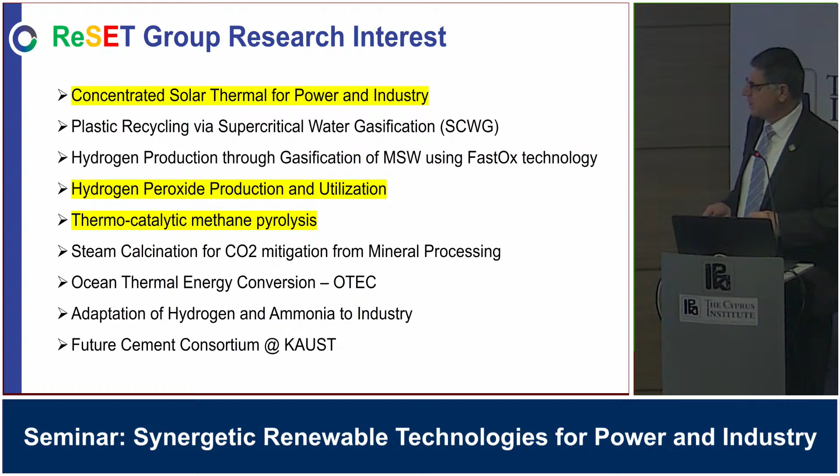So this is in general what I do. There's a lot of smaller projects that I won't mention here.

Okay, so let's look at CST, and I'm sure a lot of people have interest in here. Apologies that I kept it simplistic, and some of it is straightforward, but I didn't know how broad the audience knowledge is here or online, so I don't have to dwell on this. How do you concentrate solar energy?

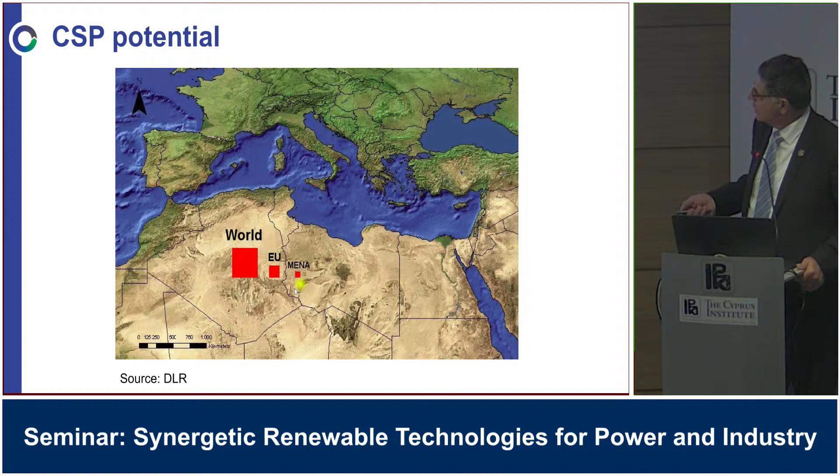I'm sure all of you have seen this before. The size of the solar resource here, of course, could power the rest of the world. But as most of you would have seen, you could see here how the cost of CSP has been dropping much faster than PV ever did. Although I only have data at 21, I think the trend is continuing, especially as China is coming online now with massive automation of production, where their pilot plant is 110 megawatts.

So the same thing happened. There's an interesting video online, I encourage you to watch it, by Martin Green from University of New South Wales, where he talks about how PV reached where it is. He says how his Chinese PhD student, who had a patent and a new invention, went to China, raised some funds from the government, and started manufacturing PV cells, how he listed on a stock exchange in New York, how within a week he raised $100 million. He goes through how PV costs have been reducing over time, and how they reach some plateaus at certain stages. He says, okay, now scaling is not enough, we need innovation. So when innovation comes, the efficiency increases and so on. But you could see somehow we are reaching some limit in terms of how much additional.

Of course, the more penetration there is, there's a problem with storage. Batteries - I'm sure you've seen the critical minerals report, how lithium demand by 2035 is going to be twice the ever possible supply, and in 2022 alone the price of lithium went up twice.

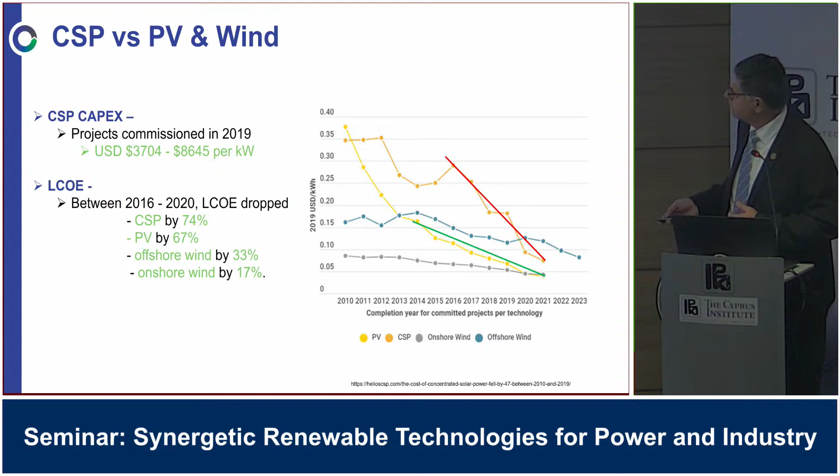So there is a problem in terms of storage, and that's where CSP offers a lot of advantage. You could see here the LCOE has been dropping - it's all captured in here. The other two are wind, as you can see there. And this is what's relevant to us here.

This is Saudi Arabia, and this is the solar resource in Saudi Arabia. I'm sure you've heard about NEOM, the new city being built there - NEOM is going to be in this area. You could see here you have the best results. In fact, a combination of solar and wind could give you roughly 19 hours. That's really a lot of energy you could utilize.

So this shows the relative amount of energy available compared to Spain, where Spain was one of the pioneering countries to install renewables. And I'll put in Dubai here, because as you know, Dubai has just

commissioned 250 megawatts of tower plus troughs as part of their energy mix. Interesting - I was talking to Acwa Power, who did the project, and they said their initial contract required energy to kick in at 4 p.m. until the morning, which is all about storage, since they have something like 18 hours of storage or thereabout. But then they changed the contract to supply energy across the day as well.

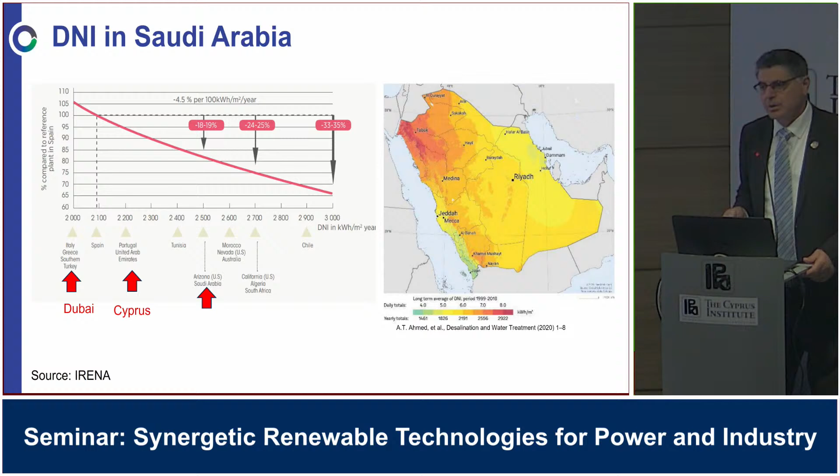Storage, at the end of the day, is where CSP thermal storage is an advantage - it can be utilized and reduces the cost if you combine them together. This is an important statement: there is more CSP thermal storage connected to the grid than battery storage.

I think only three plus years ago there was the biggest Tesla battery in South Australia, where I was, at the University of Adelaide - 100 megawatts, but that would run the state for only 1 hour. They installed it for different reasons: to stabilize the network, and to break the monopoly of two companies there who were holding supply to get the prices up. They recovered the cost within 2.5 years, which is substantial.

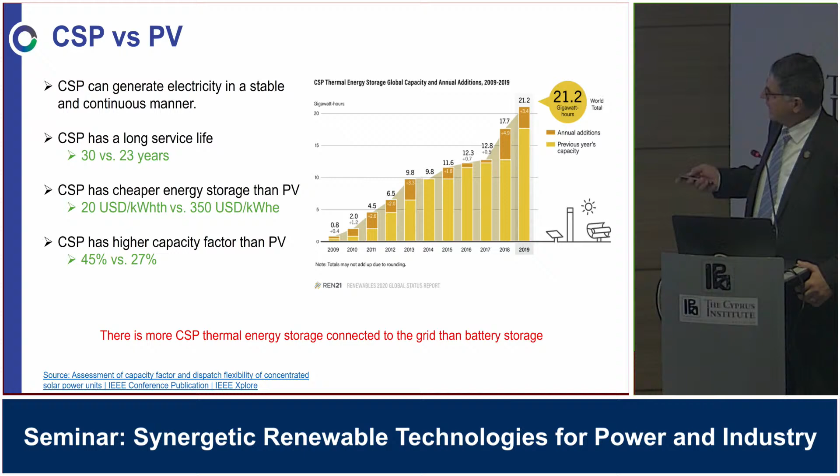So again, this audience would know all about capacity factors. This is another plot showing the thermal storage compared to all scenarios associated with batteries.

Now, of course, some of you will jump at me saying battery technology is developing, and every second day there's a big announcement. One thing is to have something really efficient, another is to have it cost effective, as well as a supply chain. These days people talk about TRL 11, not just 9. TRL 9 means it's commercially available, you buy it off the shelf. TRL 11 asks: can you buy it, is there enough of this material, can we produce it on time, can you install it? Taking it to the real world is different from saying I could buy it today - sure, demonstrations are all over the place. So the problem is, can we actually make it happen, and would it make any impact or difference?

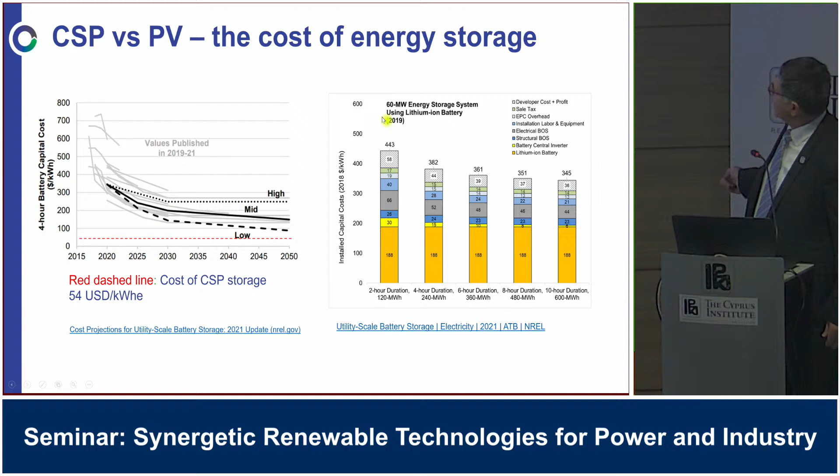Again, here are comparisons between costs of storage of different types and how the distribution is in terms of the capex.

I started by talking about synergies. The levelized cost of electricity when you combine CST and PV is much better than what you get with PV and batteries. This is where I think the niche markets for CSP need to be.

In addition, in my opinion, there are applications to the process industry. There, our efficiency is almost 80%. Whatever losses you have in the system, you're collecting all this thermal energy that you could utilize directly rather than converting it through cycles and so on.

Here are the different molten salts and so on that you could utilize. The cost, of course, going into high temperature will give you higher efficiency.

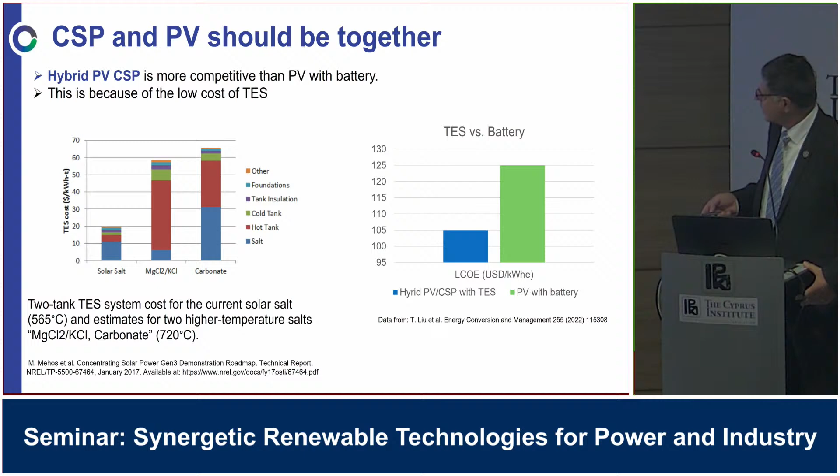In these small projects we did, a master student was visiting me. I'm not sure if you heard about concentrated PV and thermal, CPVT. So what you do is use a Fresnel system. You put a channel that has some sort of liquid in it, and this liquid has nanoparticles that can absorb at a particular wavelength. One of the problems with PV is that you only utilize the visible and the UV, and all the infrared is actually where the heat is.

That infrared is basically heating up the cells and making them less effective. In Saudi Arabia it gets up to 50 degrees, so the temperature heats up, and you can't cool it down, and then the efficiencies start dropping after a particular temperature.

So the idea here is that the energy you collect, mostly in the long wavelength, you store, and we kept it atmospheric at 95 degrees. You could utilize it, of course, at low efficiency, but you have some sort of storage, and the rest of it will go into the PV.

So we did an exercise of looking at what the techno-economics would look like, monofacial, bifacial, at different places in Saudi Arabia and so on. It's expensive, yeah, but nonetheless we need to keep thinking outside the box and figure out how we can solve this problem.

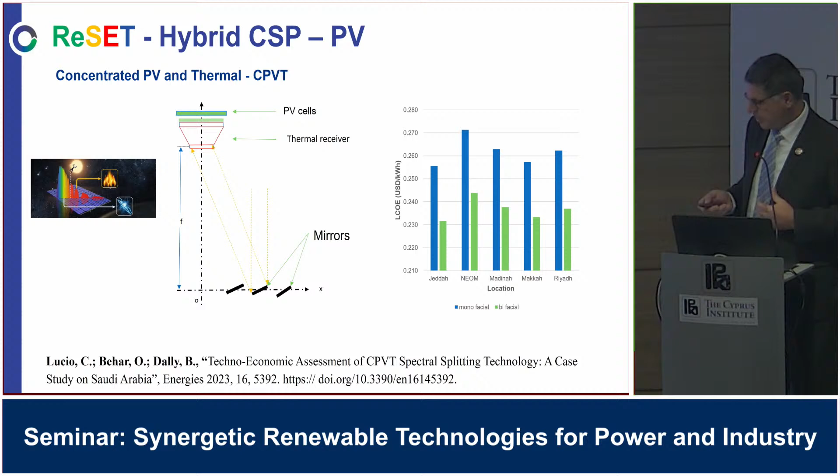Now, looking at the next generation in a way, one thing I got interested in is supercritical CO2 cycles. If I could get to 700 degrees, the good thing about supercritical CO2 cycles is that you could operate at a higher efficiency at low capacity.

That means a 1 megawatt turbine, which usually you could fit on a table, has really good efficiency. With these concentrated solar systems, you're not going to go to 100 megawatts if you have a cavity and high temperature. You're going to be restricted to maybe 10, 5, 15, 30 megawatts. So then you need an energy conversion cycle that is high efficiency at low capacity.

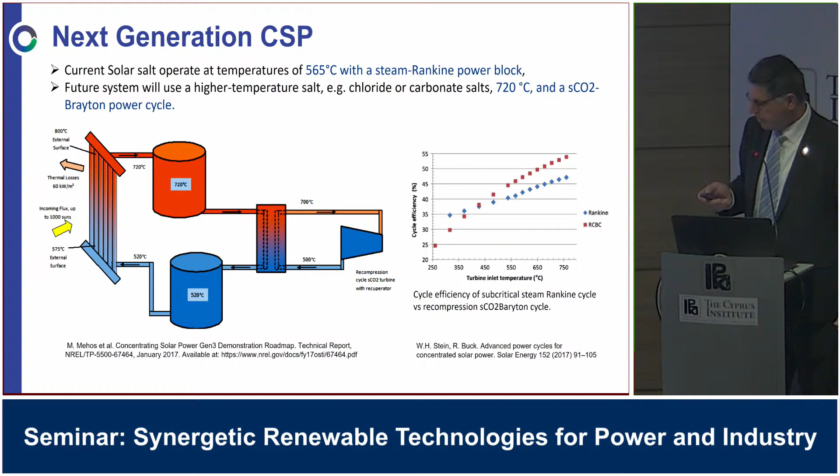So we started looking at this. We're not the only ones, of course. There's a whole European project looking at supercritical CO2. Can we do a supercritical CO2 cycle using solar thermal, and what we could do about it. In particular, we focused on the receiver.

So this thing was designed and is being built. The idea here is that, first, this heat exchanger can handle 100 bar. It's 3D printed and has special channels inside as well. The volume is full of molten metal. Currently we're using gallium, and you have a normal cavity in here.

The idea is I could run it to 100 bars, 700 degrees, which will be highly suitable for supercritical CO2 applications. For CO2, you need about 73.8 bar to get it to supercritical conditions, and 700 degrees, of course, is good.

So what we're hoping for, and why we're filling it up with molten metal, is to enhance the heat transfer and to allow this heat exchanger to expand in whichever way it wants without being restricted, other than on the top, where there's another inlet as well. And then have basically some thermal mass, so that if I have a cloud or something like that, I don't end up with a total reduction in a very short period.

This work started with University of Adelaide. Mehdi Jafarian, who's now moved on to somewhere else, is supporting us.

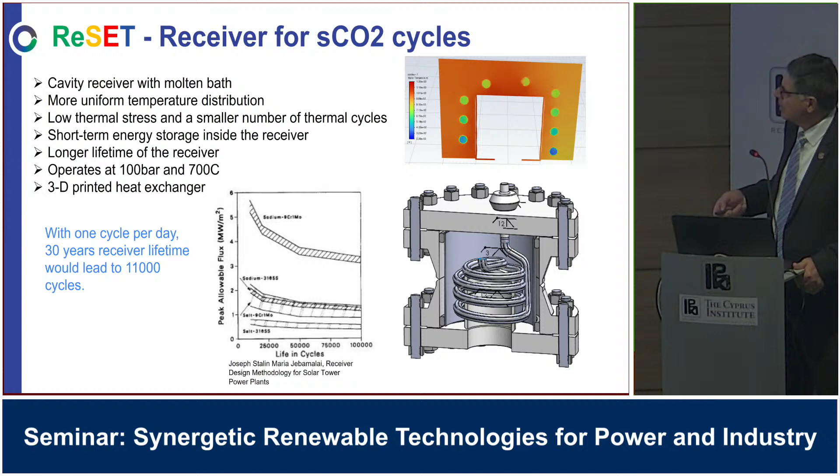So for that, I built a solar simulator. It's 42 kilowatt electric, giving me around 12 kilowatt thermal. Bought it from China, gives me a 60 to 80 millimeter diameter, and it can be modulated from 2 all the way to 42, with 7 xenon arc lamps, each 6 kilowatt.

It's now fully operational. It took us a long time. It's a small room, you need to get all this in it. The rest of the 30 kilowatt you need to get out somehow, which we managed to do, and now it's fully operational.

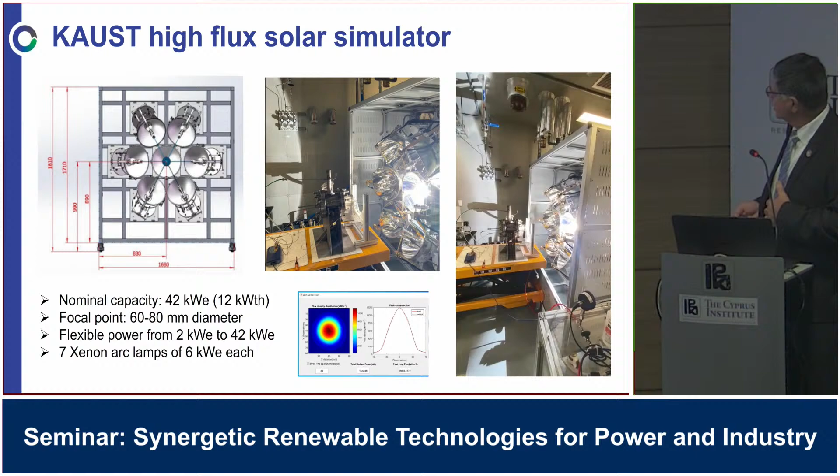Here's another design which is again utilizing 3D printing. Here I want to do industrial gases - I want to heat up air to high temperature at pressure and see if I could crack the efficiency part to try and make it economical.

So what you're looking at here is a 3D printed porous material made out of Inconel in this case. Within it is a double helical integrated heat exchanger that will give me up to 10 bar for now. We set 10 bar to allow it to go, but I think we're going to do hydrostatic testing to see if we could go to much higher pressures.

The idea here, we modeled the whole system. We do have a concentrator in there, and then we looked at the flux at different directions, and then we changed the porosity to trap the energy as it goes through.

We've done some modeling and we think it's going to work well. It has been printed, it has been heat treated, and we should get it next week.

We want to try and start with air and see how we go from there in terms of other gases that we're going to try and basically pressurize and heat up. Mostly we're interested in the energy density evaluation - can I get to the energy density required to make it viable, basically?

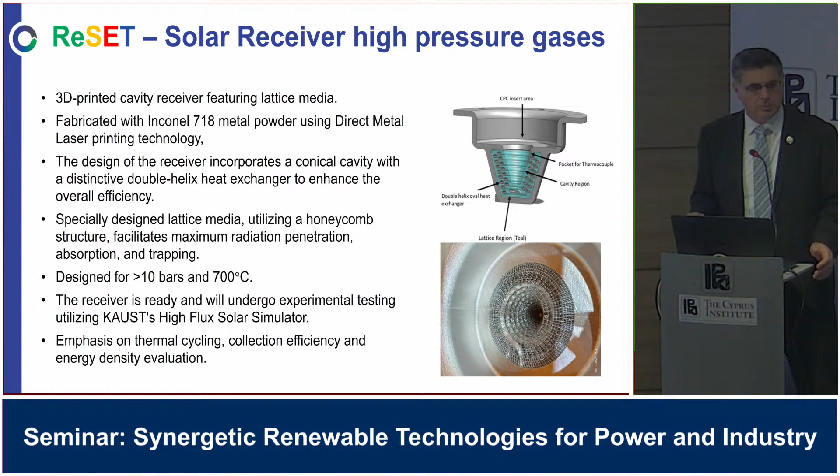That's another project looking at - I mean, this is a simplistic view - can I use concentrated solar for ammonia cracking? Of course, 28% of the energy of ammonia goes to power the cracking back into hydrogen and nitrogen.

The idea is that Saudi Arabia wants to export blue ammonia to the world, and then from there they're going to crack it. They developed a very efficient catalyst, but they need to run it at 450 degrees. So the idea is, can I do this here? Can I heat it up to 450 degrees and so on, and what sort of conversion efficiency am I likely to expect?

The catalyst is supposed to operate at more than 80% at these conditions. Of course, you need the membrane, you have to separate it and so on.

But the real big project is looking at hydrogen sulfide. Most natural gas in Saudi Arabia has H2S in it, and there's a lot of restrictions. Once it burns, of course, it creates lots of nasty things that you don't want in the atmosphere.

Then they're looking at what's called a photocatalytic way to remove H2S. Currently they're saying just destroy it - in other words, there's a catalyst that could operate up to 800 degrees, by which H2S is basically separated. The sulfur supposedly ends up in its solid form that we'll be able to remove, and then you have hydrogen that goes with the natural gas we want to capture, basically.

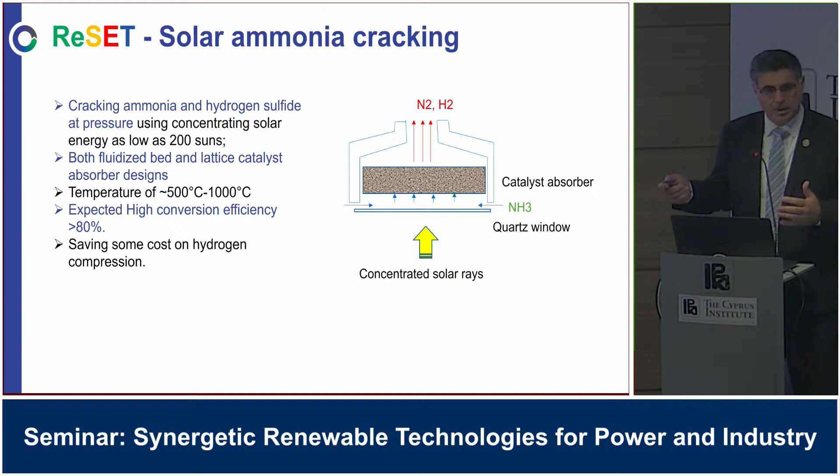That's another thing that I learned in the past, and also with the synergy, is hybridization. So when we looked at how do you introduce renewables to industry, first thing industry wants is firm supply. They want it all the time. They want fixed temperature, and they want certainty. They're risk averse, they won't allow you to say, oops, today the sun is not up.

So what we came up with is what we call a hybrid solar receiver combustor, basically combining both expertise. This is just a normal cavity, and here we have additional burners that during the night we're able to close this window and operate the burners, keeping the whole system hot, and then during the day open it up and continue operating.

But what we managed to do is also a 3-mode system: solar only, combustion only, and combined solar and combustion. We built the system at 20 kilowatts, could go up to 40. Then we looked at the efficiency of the collection, the maximum temperature we're able to achieve, and we had students doing techno-economics as well.

So there's advantages, of course. You could start operating anytime, once the sun is up, so you don't need a threshold for things to start. You could continue operating, so your molten salt remains at the required temperature all the time. It's one system rather than two or three, so you have one energy source if you want. We compare this to a standalone boiler that needs to run idle all the time, so this is continuously operating.

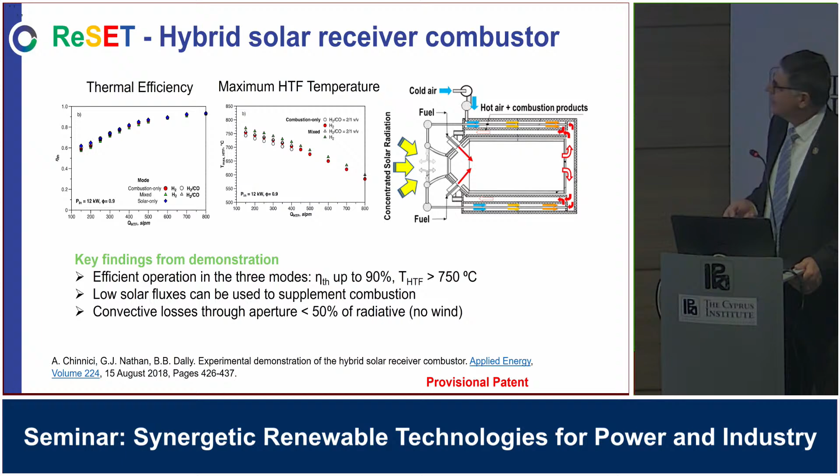So I'm looking to scale this up. It's not on the top of my priority. We do have a provisional patent on it, but that's something in the background now.

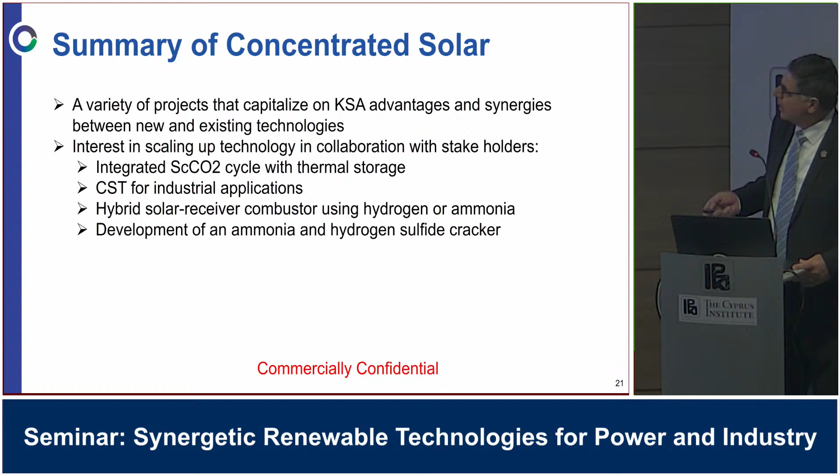So let me summarize the concentrated solar work: a variety of projects that capitalize on the Kingdom of Saudi Arabia's advantages and synergies between new and existing technologies, with interest in scaling up technologies for the supercritical applications, for industrial applications, for the hybrid system, and also for the ammonia and sulfide crackers. I could stop here, or we'll have questions at the end.

So the motivation is finding a cost-effective solution to store, transport, and utilize oxygen, which will help reduce the cost of green hydrogen. If I can valorize oxygen, then the price of hydrogen is supposed to drop. So the concept is to convert or store O2 in H2O2, ending up with 40+% by mass of H2O2 being oxygen, using electrolysis or plasma, and then transported with water.

Now, H2O2 in its pure form is highly explosive. It has been used in the past as a rocket fuel. But if you blend it up to 40% H2O2 in water, it's safe—you could go to the shop and buy a gallon and bring it home. And we need to find utilization routes. Producing it is one thing; what do you do with it is another. One question people ask is, okay, we have oxygen, but all the oxygen we need we could get from an air separation unit and generate it on the spot—you don't need any of this. Of course, there's a cost of transport, a cost of pressurizing, and risk as well.

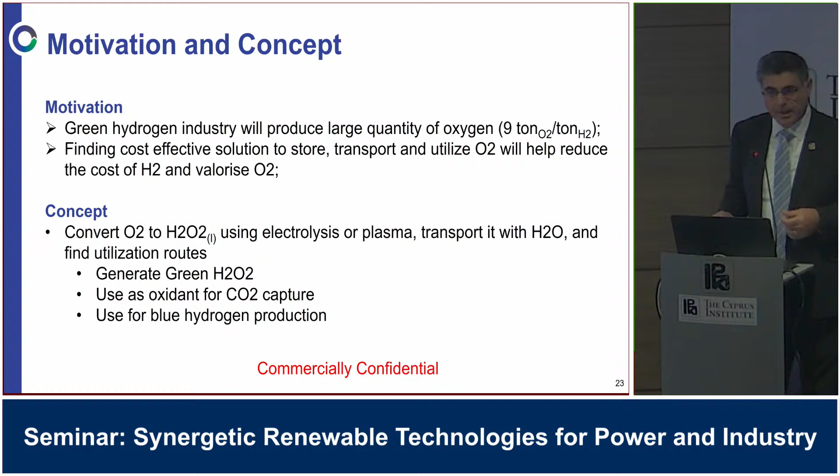That reduces the capture cost. And maybe also use it for blue hydrogen. What do I need to produce hydrogen from fossil fuels? I need steam and I need oxygen. Now, this has steam and oxygen and renewable energy in it as well. So this is the concept, yeah?

This is a little bit more information about H2O2. I won't bore you with a lot of the details. It's an interesting molecule that can easily lose its oxygen if it gets in contact with some metals. So maintaining it in its original form is a challenge. But if you put it in water, you should be safe.

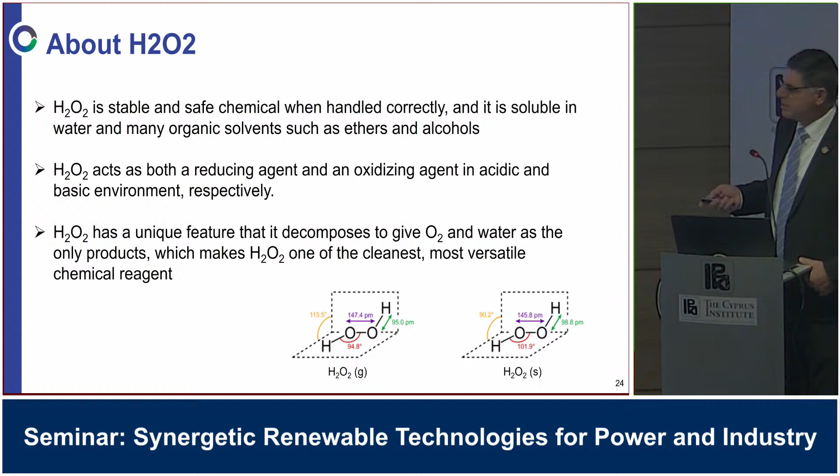So usage and price: currently there's 4.5 million tons per annum as of 2020. Paper industry and chemical synthesis is where it's used. Market price is between 500 and 1,200. Remember these numbers, because I'm going to show you new numbers in a minute using the other routes.

So this is how it's being used: as a disinfectant, by the way, you could buy it in pharmacies, or people use it to clean things, but those are at a concentration of 1 or 2%. So the grades: 90 to 95% is pure fuel used in rocket propellants, 35% is for other things, and less than that for domestic use.

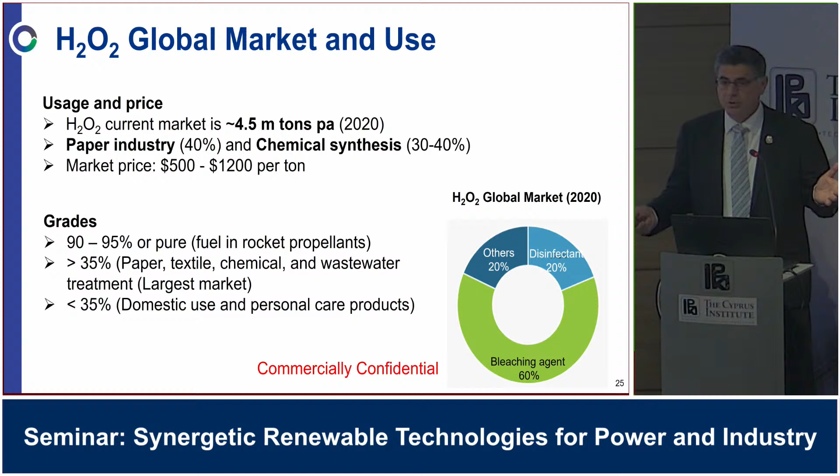Okay, so there's a market. We know how to deal with it. We've been producing it for a while. This is where it's being produced. Again, I won't bore you with the details, but this is where most of the production is.

And then the large scale process is using an agent called anthraquinone, which accounts for about 95% of global H2O2 being produced today. The most important part is that through doing this, you have to start with hydrogen and oxygen, and then combine them using a third agent, and it's a lengthy process. It's actually energy intensive, and each ton produces roughly 600 kilograms of CO2. So yes, I want to valorize oxygen, but if I'm able to find a route to produce green H2O2, then I actually also save on CO2, and I'll have a new market for it, although the quantities are not huge.

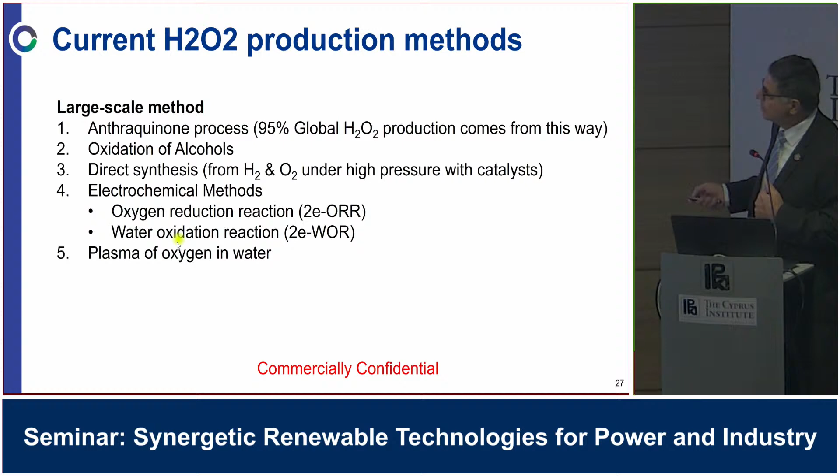The other processes are oxidation of alcohols, direct synthesis electrochemically, and plasma in water. So I'll show you some of these techniques and what's wrong and what's good about each.

So here's the three: there's hydrogenation, then oxidation, and then extraction. And this is the magical number: 600 kilograms of CO2 per ton of H2O2 today. And it's energy intensive as well.

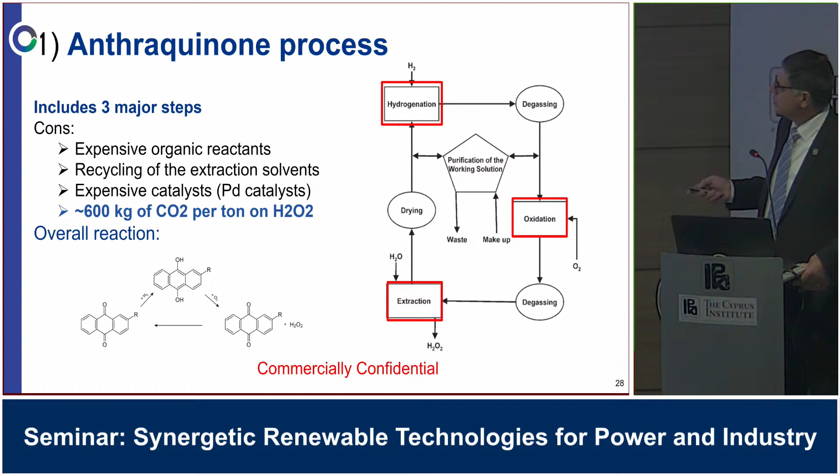Two-propanol oxidation or other oxidations of alcohol is also known, but you have to start with something that is already being produced. Of course, that comes with a cost and so on.

Direct synthesis uses hydrogen and oxygen, but the idea is to valorize oxygen from the green hydrogen industry. I don't want to utilize this expensive hydrogen. I want to basically have different ways to actually produce H2O2 rather than utilize hydrogen itself.

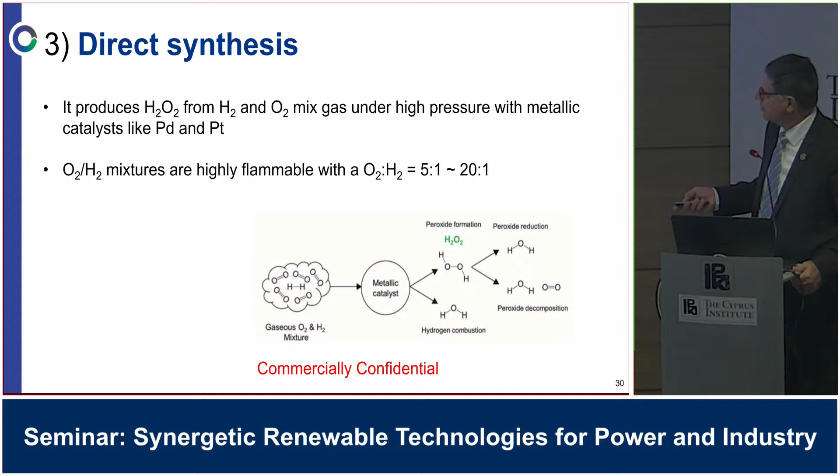So electrochemical, I mean, it's a known process. The problem with this is that it's not in its stable form. It does combine, but it can easily go back. Maintaining it at its current form is actually one of the problems. So having selective catalysts and the right environment has proven to be quite challenging. Actually, this is the route I took first, and I had a postdoc spend six months scanning the literature, trying to do things himself and so on.

The best we found is a paper which claims 10% H2O2 using electrochemistry. We invited this guy to give us a talk, and he said okay, we're going to work with you. It turns out the whole thing is a hoax, basically. He won't tell us what he did, why he did it, or that he'll be able to reproduce it.

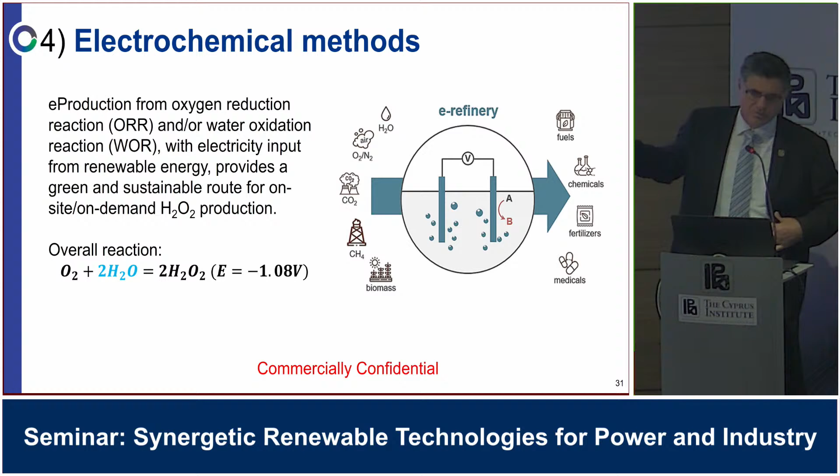I spoke to an expert in the field, and he said don't believe any catalysts claims—sorry if there's any catalyst people here. Most of them produce material that, okay, they're happy to put through the market and get tested, but there's lots of claims in the literature that cannot be reproduced. Anyway, it is a problem—it's not easily done, and you need expensive materials to be able to do it.

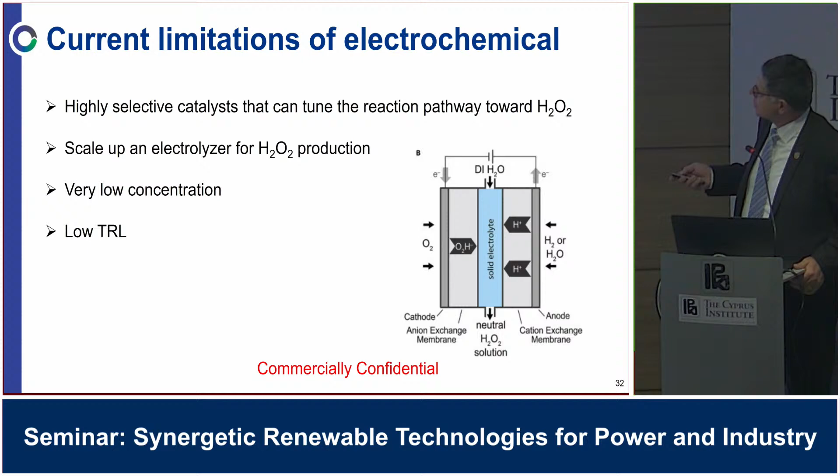So I gave up on electrolysis or electrochemical ways and went to plasma. Producing ozone with plasma is a well-known thing, and there's a lot of work done with air. The problem with air is that you have oxygen, nitrogen, and high temperature, so you end up with NOx, NO and NO2. We're creating a new problem—this oxygen is going away to produce NO and NO2 rather than H2O2.

So oxygen alone in plasma with water has two routes. One is with H2O, it can actually produce OH and H. Oxygen alone can also produce ozone and O. These two can combine and produce another OH, and then H2O2 is two OHs together. The problem is that it can also combine and reattach itself. So this is where we're up to now.

There's very little research on oxygen and plasma. I have a program just started—we have an expert in plasma at KAUST, Deanna Lacoste, and we decided to start this project. We're not the first ones to put oxygen plasma in water, but nobody had the intention of increasing the concentration, and what you need to do with pressure, temperature, and whether you need a third agent to scavenge what's being produced. So this is where all of our research is happening, trying to increase the yield and monitor the amount of energy being utilized.

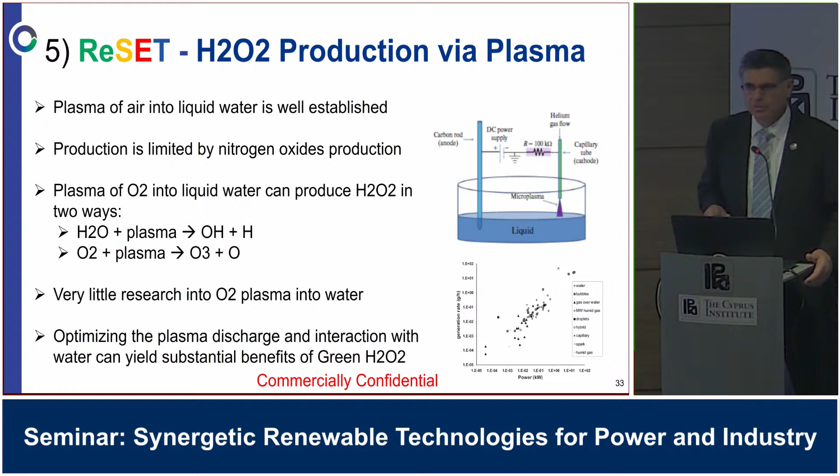My current thinking is that energy efficiency—of course, going from electrical to plasma has its problems—but the energy is all inside the water solution I'm trying to produce. The question is how do I convert it to the right sort of chemicals that are required rather than into just thermal energy?

Now, utilization—I said there's only 4.5 million tons per year, which isn't a lot in terms of consumption. So we came up with this concept: if I take a fossil fuel and react it with H2O2, we end up with CO2 and water. Not just that—when H2O2 dissociates, it gives me this energy, and that energy came from renewables. So I'm not only carrying oxygen, I'm carrying renewable energy with me in the same molecule.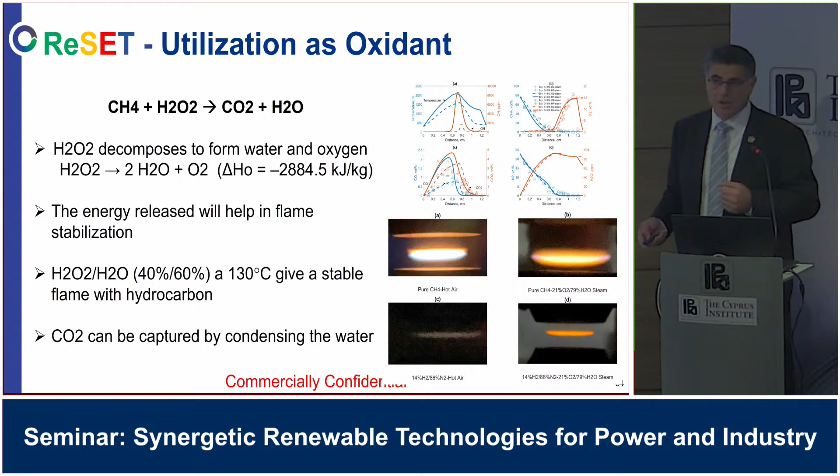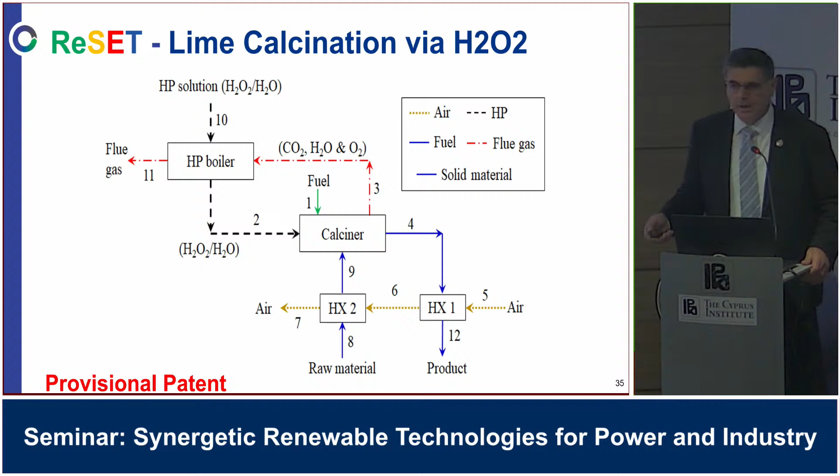Now, this actually started well before—this started in Adelaide. We have a provisional patent asking can I use H2O2 for limestone calcination? It's the same concept again: bringing in some fuel, then I'm able to capture the CO2, and basically I don't have any nitrogen in the system at all. Then we've done some techno-economics, looking at how much it would cost and at what price.

This is the energy from CH4 and air. This is basically the flame temperature from a mix of H2O2—HP is hydrogen peroxide—and methane. You could see, depending on the concentration, we could achieve higher temperatures than we have here.

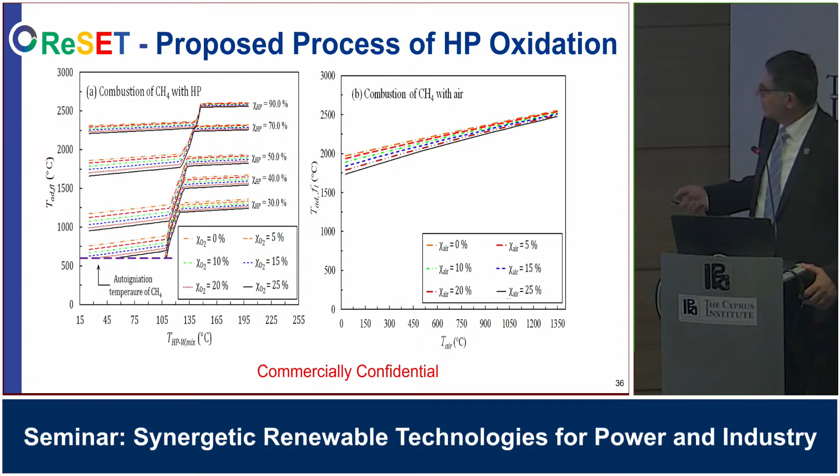So the temperature required for calcination can be achieved through the system. And then we looked at how much the CO2 saving is. This is if the hydrogen peroxide is produced from the current process, that means 600 kilograms per ton. And you can see here that we're able to save up to 40% in CO2.

This is if it's produced from renewables. So we have a major saving, basically whatever we're saving. Of course you'd ask, why is it positive? Mostly because we haven't spent the 600 kilograms in the first place.

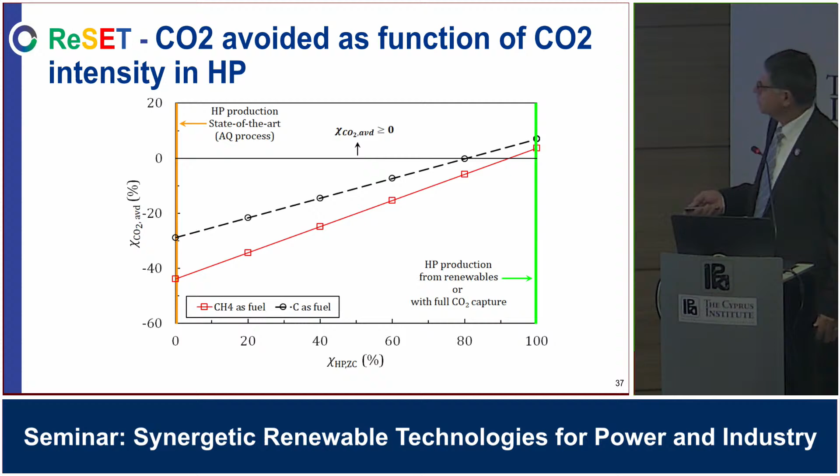So the other approach is, you remember I said that to reform methane you need steam and oxygen. Well, H2O2 gives me both steam and oxygen. So the idea is, can I react my fuel, whatever it is, with some H2O2 - of course there's water around - and produce my hydrogen, and it's roughly energy neutral.

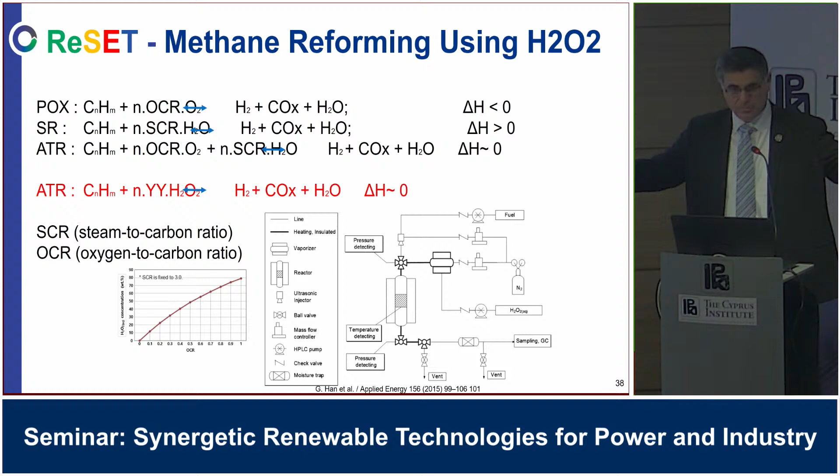We've done some work on this and we believe it's actually doable. A student is now experimenting on it, and that will give an advantage. Why? Because then this stream of H2O2 I'm producing has direct application. We're talking about synergies - it is a product of green hydrogen that's helping produce blue hydrogen. So one is complementary to another.

So then, of course, the big question is, this is too expensive, this is stupid - how can you make it work? So we went to compare what you do with oxygen, with and without. And of course we didn't go all the way to figure out how much it costs to capture CO2 compared to doing it this way.

But here we looked at Saudi Arabia and said, okay, what if the H2O2 is going to be used in the Eastern Province? The Eastern Province, basically where the Persian Gulf is, is where most of the oil and gas resources are, and this is where they're producing all their hydrogen. I showed you where Tabuk and Neom are, and this is where all the good renewable energy is. So we wanted to see, do we use it in the western side of the country or in the eastern side?

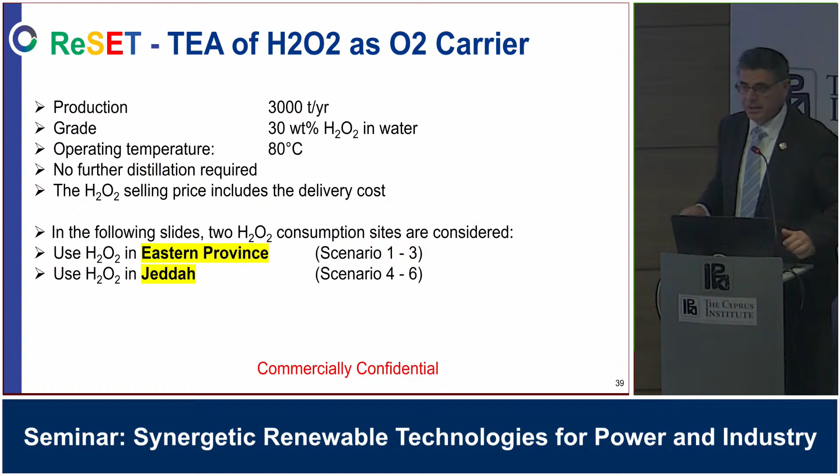So then we looked at different scenarios - I won't bore you with a lot of the details. But we assumed we'll be able to produce it from renewable sources. Then we compared producing it on the spot using an ASU versus basically transporting it over. If we want it in the Eastern Province, that means we're going to crisscross the country, and then there are two ways around it, either through a pipeline or land freight.

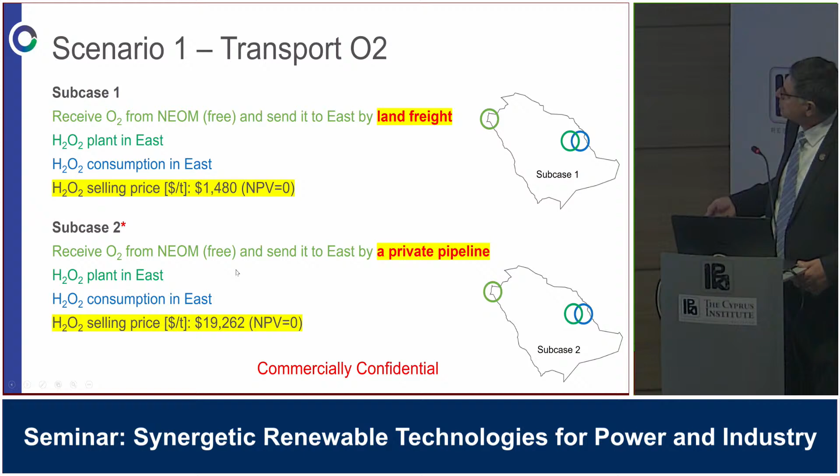And then we're looking at the cost. Here, the cost is 1,480. Remember before it says between 500 and 1,200. So this is more expensive - this is also very expensive as well. And by the way, these are just transporting oxygen, not H2O2. This is basically compressing the oxygen, putting it in trucks, and taking it to the other side of the country.

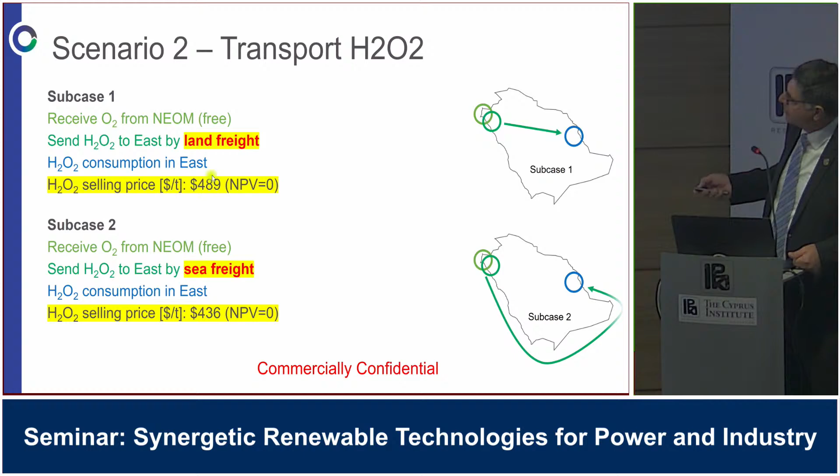And then we even looked at sea freight, and we'll see actually it's relatively okay. And then transporting H2O2, you could see the prices here dropped substantially, 489 - so this is less than $500. And this is a comparison with an ASU unit, showing that if we do this, what do we get in return? With the ASU, you could valorize the liquid nitrogen.

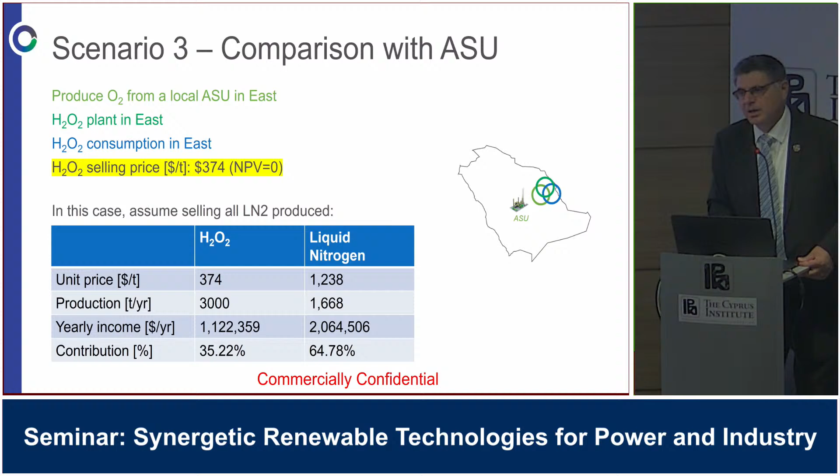But then again, we'll end up with the same problem - we have too much nitrogen, which may not be needed, or it's in the wrong place. Anyway, it's just an interesting exercise of, if it becomes viable, or if it actually solves all the technical problems, would it be viable financially?

So here's a summary of this. We developed a plasma system for O2 and H2O to produce green H2O2. We developed scaled up technology for utilizing the H2O2/H2O mixture and the capture of CO2 from fossil fuels. We scaled up autothermal methane reforming using that. And again, we're investigating hydrogen peroxide for the calcination of limestone, manganese, and bauxite - all of those are of interest to Saudi Arabia.

So this is an ongoing project. I have 2 postdocs and 3 students working on it, and we have interest from industry as well.

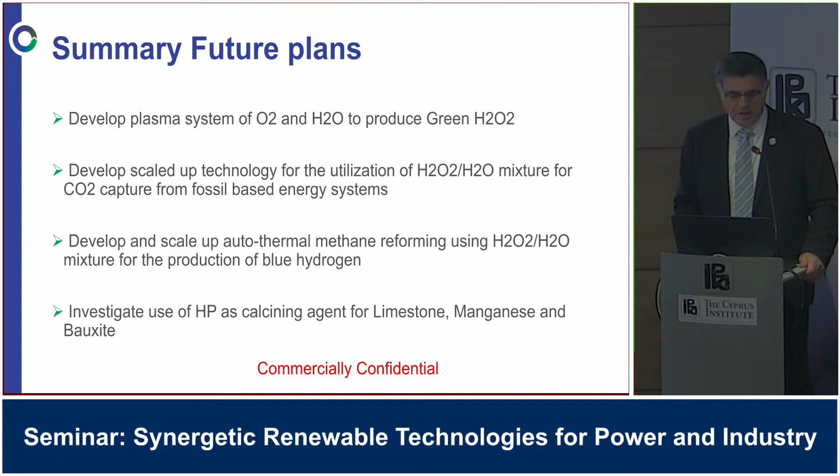All right, my last topic is about turquoise hydrogen. Of course, many of you know all the different colors: black, gray, blue, and green. Ultimately, we're all going to do green because we love green, but at the end of the day, of course, we all know it's not going to happen.

The issue is that 70 to 80% of the cost is electricity cost, which requires PV currently. The price of metals is going through the roof, so the PV cost has basically plateaued. We also have a problem of supply and sovereignty issues. There's a lot of countries now hugging their own supplies. China, in particular, a couple of months ago, banned export of any lithium extraction technology, full stop. They don't want anybody in the world to extract lithium because they want to take control of that market. 70% of batteries in the world are produced in China, as you know. And it goes on and on. So it's not just about whether we can produce it quickly enough, but where we can produce it. Even Saudi Arabia is now buying mines in Chile and Africa to secure supply of special metals, because they want to produce electric cars as well.

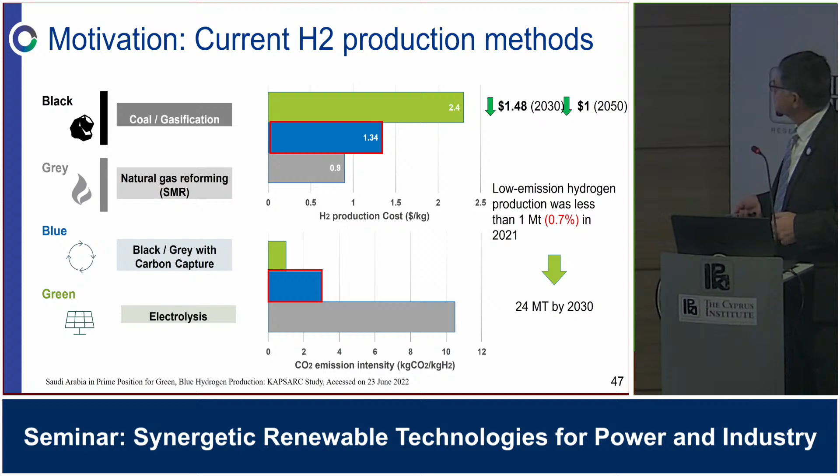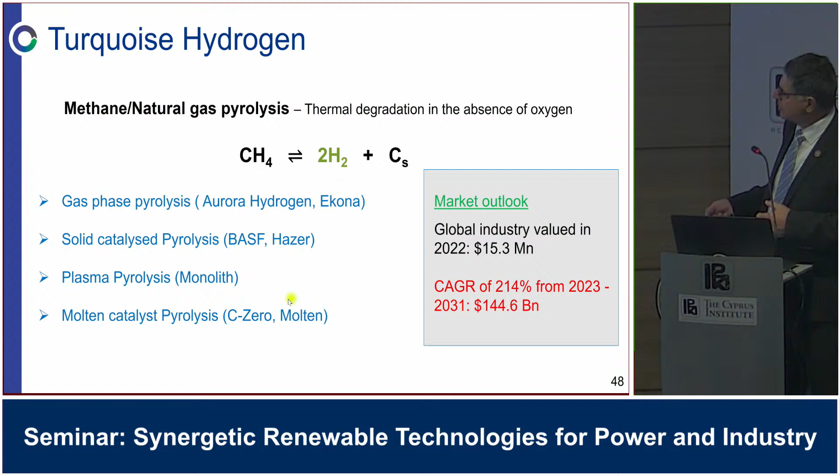So what is turquoise hydrogen? Basically, we're taking natural gas and converting it into hydrogen and solid carbon. There are different ways to do this, but what we're interested in is this sort of—sorry, I missed something here.

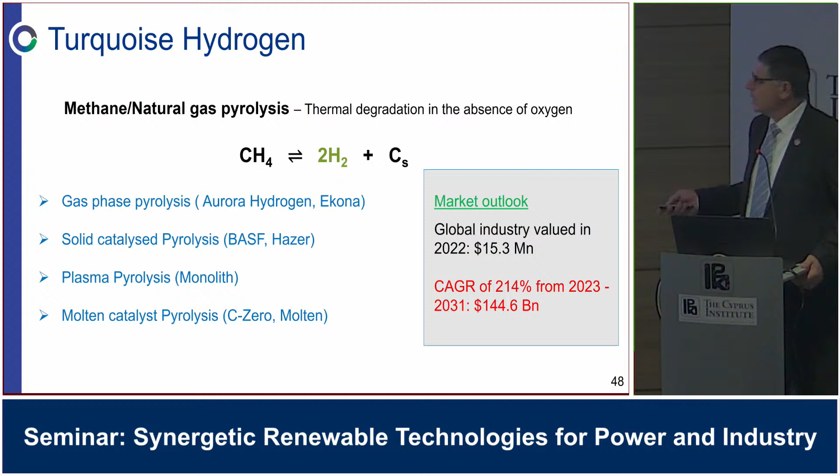What also encourages us is that the market for turquoise hydrogen is about to mushroom, and the compound annual growth rate is likely to reach 144.6 billion by 2031. So this is big money if you can get it. The question is, would it add up?

So again, red flags: high temperature requirement, gas phase pyrolysis, solid carbon deactivation, catalyzed pyrolysis, and hydrogen selectivity issues. Many other problems exist too. There are commercial companies operating today. Some of them compromise on the catalyst—like in Australia, the Hazer Group, they put iron particles in there. The iron particles capture the carbon, and then they dispose of it, piling it up, saying maybe in the future it will be worth recycling, but iron particles are relatively cheap. Others do other things with it, but we're interested in molten catalyst pyrolysis, and also hoping we'll be able to solarize it as well.

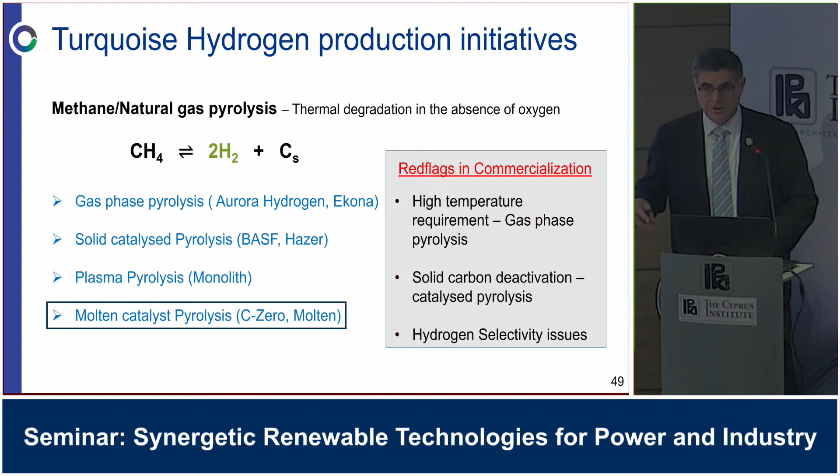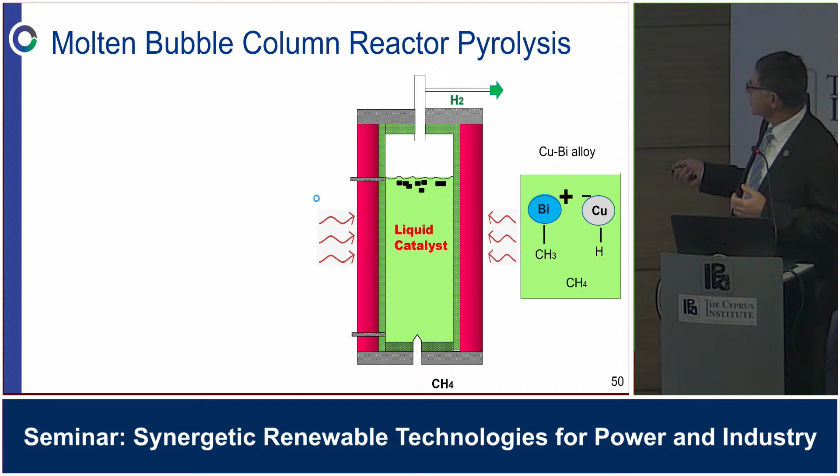So we have some funding from ACWA Power. This is how the process works: basically, you have a molten catalyst, you simply bubble the gas through it, okay? You collect the particles on top, and you collect the gas in the exhaust.

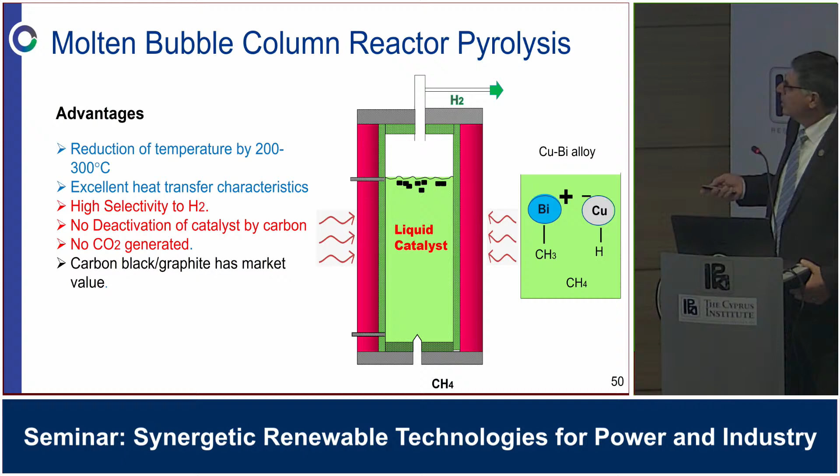Advantages: reduction of temperature by 200 to 300 degrees, excellent heat transfer characteristics. Some papers show the heat convection coefficient is something like 10,000 to 12,000—unbelievable. And then high selectivity to hydrogen, no deactivation of catalyst by carbon, and no CO2 generated, of course. All these are advantages. Carbon black graphite has market value, and so on.

So this is what we did. Basically, here's a furnace, we heat it up. Inside this tube, there's 8 centimeters of gallium. We put a perforated quartz system underneath, brought some methane into it, and bubbled it through—that's the only thing we've done. Then we collected the—you can see in here how hot it is, and this is all radiation, by the way, this part is not that hot. Then we're collecting samples into the GC, and looked at the conversion rate.

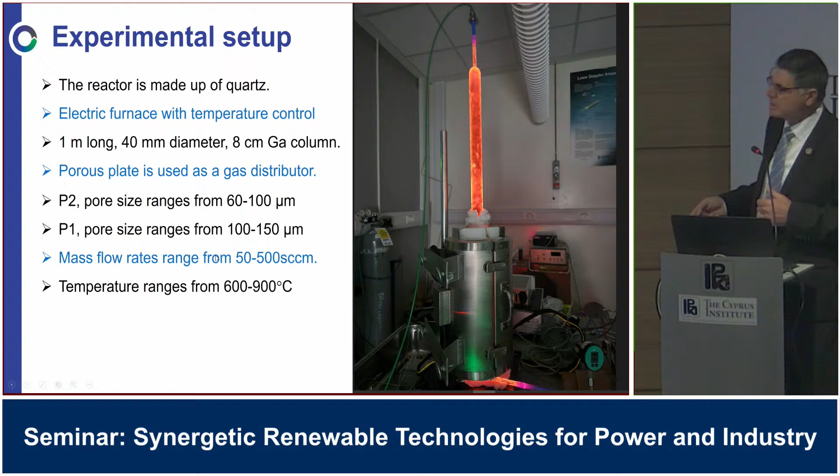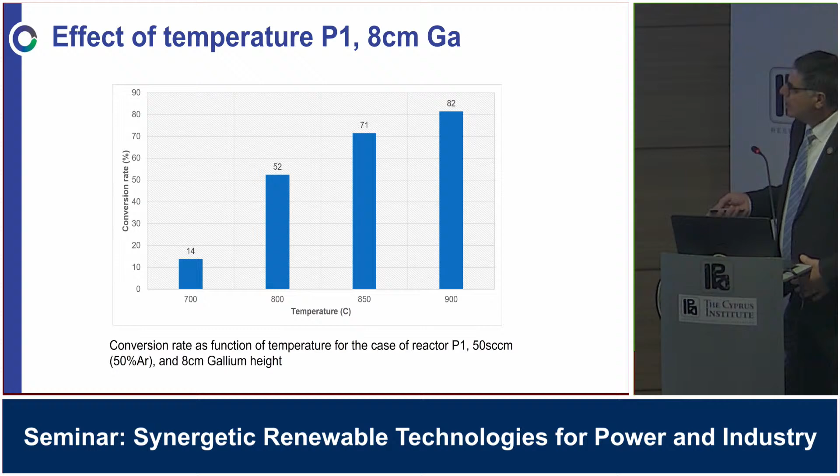We changed the temperatures from 600 to 900, and changed the flow rates, residence time, and the pore size. And this is what we found: at 700 we have 14% conversion, but at 900 we have 82% conversion. This is quite a high conversion rate, actually. So we're pleased with that, and we were also looking at how to scale this up—this is the mass flow rate. Of course, if you reduce the residence time, your conversion rate is going to drop, but you can make the bed longer. You'll increase a little bit of further pressure drop, but it's not a big deal.

And at 700 and 800 degrees, the effect of pore size is that the smaller the bubbles, the better the surface to volume ratio. What happens is these bubbles, the surroundings basically provide all the heat, and inside the bubble you're creating the hydrogen and CO, the hydrogen and the carbon.

Now here's something I'm really interested in. If the path to the end of the bed is long enough, can the hydrogen penetrate from the bubble and separate, so you don't have to worry about equilibrium anymore? You remember at different temperatures you get equilibrium, the conversion rate stops and you go backwards. So if we're able to make this path longer, can I liberate the hydrogen because it's 8 times lighter than carbon? Of course, there are flaws because the molten metal is quite hot and quite heavy as well.

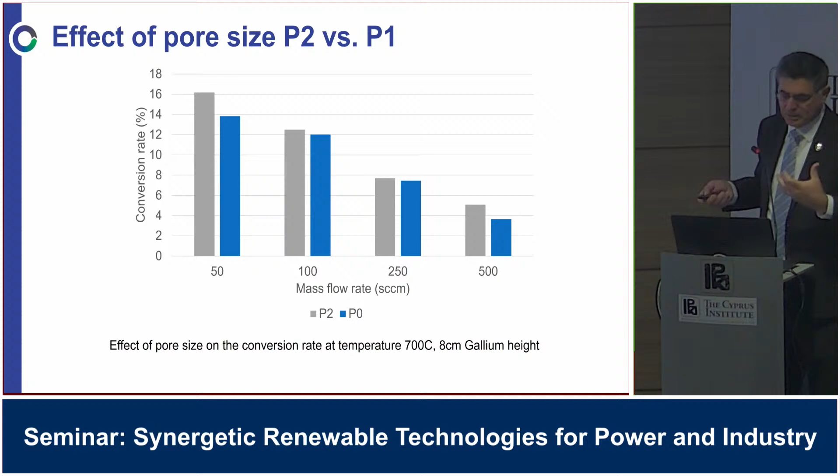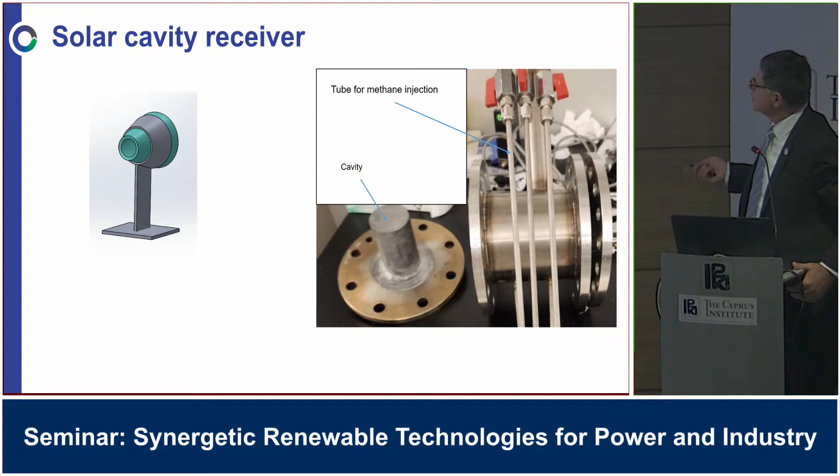Unfortunately, we had some trouble. There's no information about how corrosive gallium is above 500 degrees. Basically it doesn't exist - it says it's a little bit corrosive at 500. But when we went to 700 degrees, within an hour we had 3 holes on top of this stainless steel reactor, which is 5 millimeters thick.

Absolutely unbelievable. So students came and said, 'I have a leak.' And I said, 'Can be.' But when we opened it up, sure enough, there were 3 holes in the top. The molten metal ate the stainless steel. So now we're building a new one with better material.

We're going to try it again, of course, but then we don't have to use gallium. Gallium is a metal of convenience, available, although a little bit expensive. Bismuth nickel is actually just as good, much, much cheaper than gallium. We wanted something efficient to show what we could get to - high conversion and so on. Corrosion is relatively low below 500, but above that no data was available, so we cooked the system.

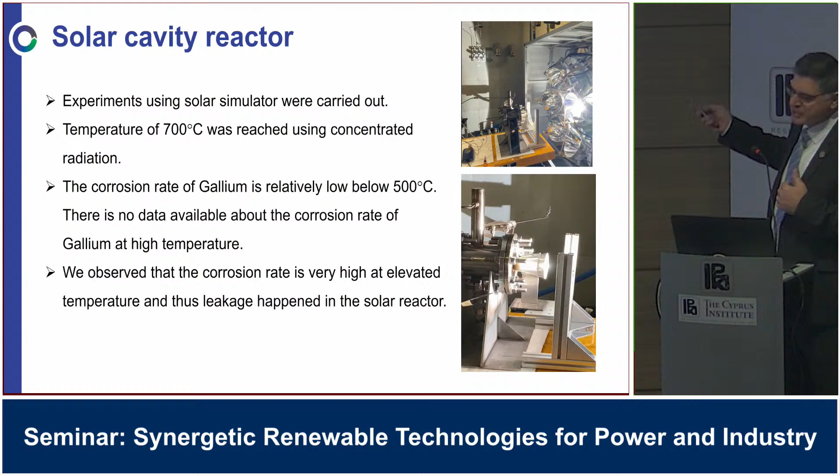Yeah, this is what we saw before - of course this is without the insulation, so I'm not sure what... insulation. This is the new design, and we're hoping to have results in the next month or 2. It's just a proof of concept.

We wanted to prove to the industry that using solar, we are able to produce turquoise hydrogen. Of course, in most other systems you could use electric heating, resistive heating, or a hybrid system as well, so that you could continue operating during the night.

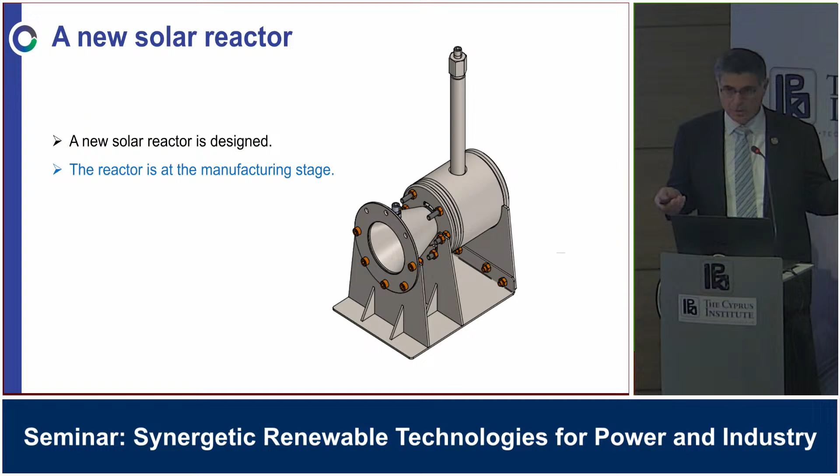I don't show it here, but we have a new provisional patent - I'll come to this in a minute - which actually has a 3-core reactor at 40 bar, a cool mechanism to collect the carbon, and also a mechanism to integrate replacement of the bed from the outside.

That's something sort of in the works as well, and we're hoping to get some funding from the Saudi government. We've done an interview last week. Now our technology is listed in the top 10 strategic technologies for the kingdom, and we passed stage 3. So fingers crossed some funding is going to come to scale up, and we're going to do a 1 ton per day facility based on what we learned so far, and then see how we go with it.

So we've done some modeling as well to try and understand what the cost is, because at the end of the day, if we aren't able to compete, then what's the point? And this is why I started with a slide showing what the current prices of hydrogen are.

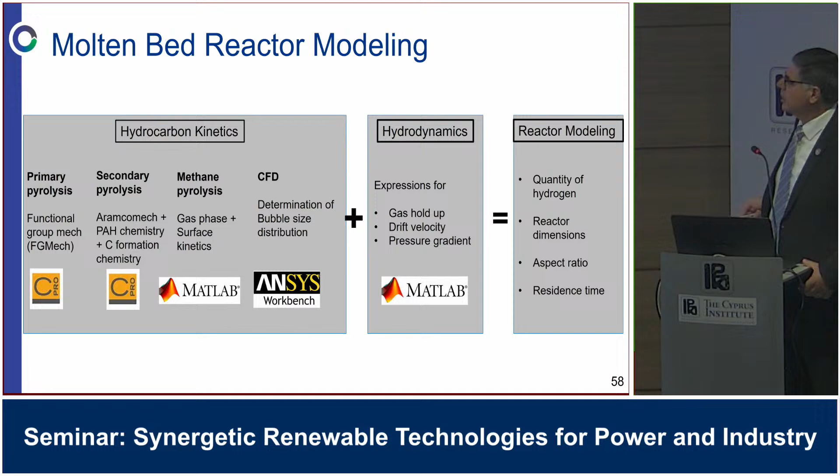Okay, so to start with, we compared our results with what's in the literature to make sure that our conversion model and the temperature are actually accurate with what's available, and we were able to duplicate that quite well. We've also done some fitting on our own generated data and compared it with that as well.

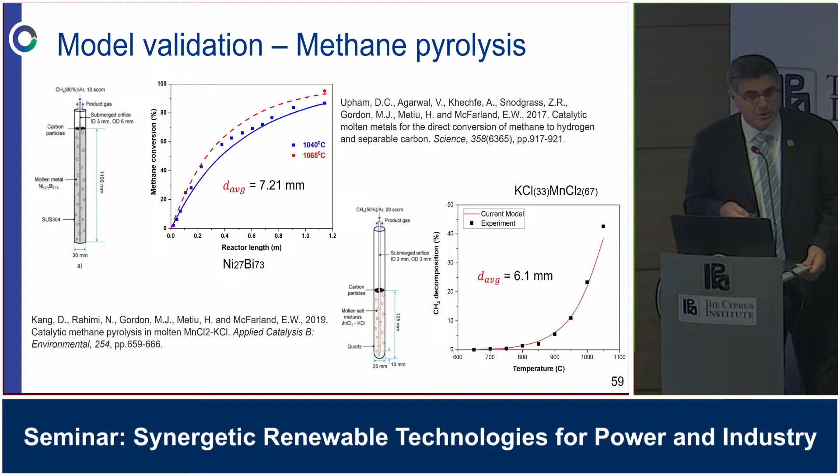The type of carbon you generate is highly dependent on the temperature and the type of thermocatalyst material used inside. We've just written a review paper on this, soon to be accepted. The price of this carbon can change by a factor of 1,000 depending on the type produced. If it's low grade, it has two applications: you could add it to concrete and cement, which is quite useful, or use it to enhance the quality of soil. But at the other end, if you produce carbon black with particular phase structures, you could get 1,000 times more money for it.

So when we do our techno-economics, we don't assume it's going to be one specific type—we assume it spans the whole range. In fact, in the current model I'm going to show you, we assume there's no value for the carbon at all, just to be on the safe side, so that any value the carbon adds is a bonus rather than an impediment.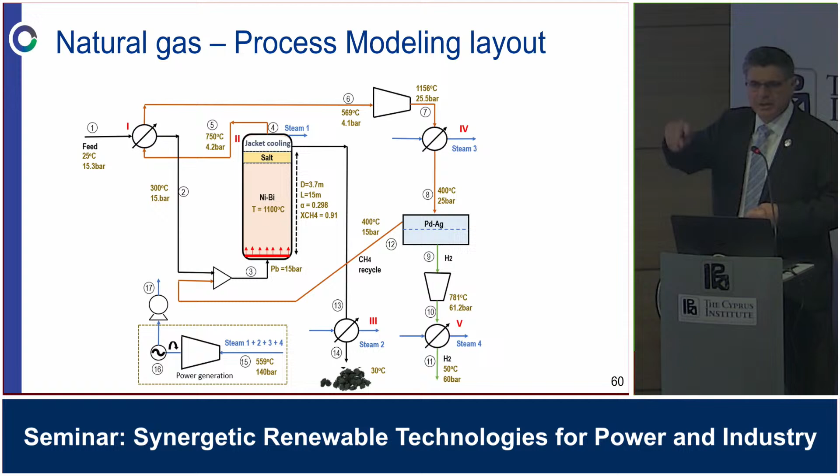Again, this is a sophisticated model looking at what we could do with it, but as you see, the system is relatively simple. Of course we need cleaning, and we recirculate material that hasn't converted, and so on.

On techno-economics, again, all the details are here, and some of it is well developed while other parts are lower TRL. But let me show you some results.

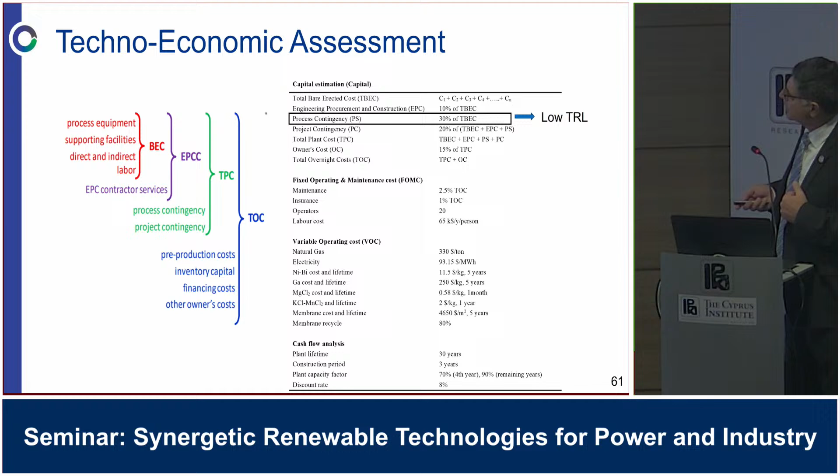Currently we're looking at powering it using electricity, so we have to assume a cost for grid electricity. We also consider solar PV and storage, or a mixed approach, using solar during the day and something else at night. We also wanted to make sure about the lifetime of the nickel bismuth—whether we replace it every year, every 2 years, or every 5 years—since the cost changes as we go through that.

We used pressure swing adsorption to separate the hydrogen instead of a membrane. We've done comparisons showing the hydrogen production cost per kilogram, using current natural gas prices in Saudi Arabia of between $55 and $60 a ton. Remember, the gray hydrogen cost was 0.9 and the blue hydrogen was 1.34, so we're looking competitive with those.

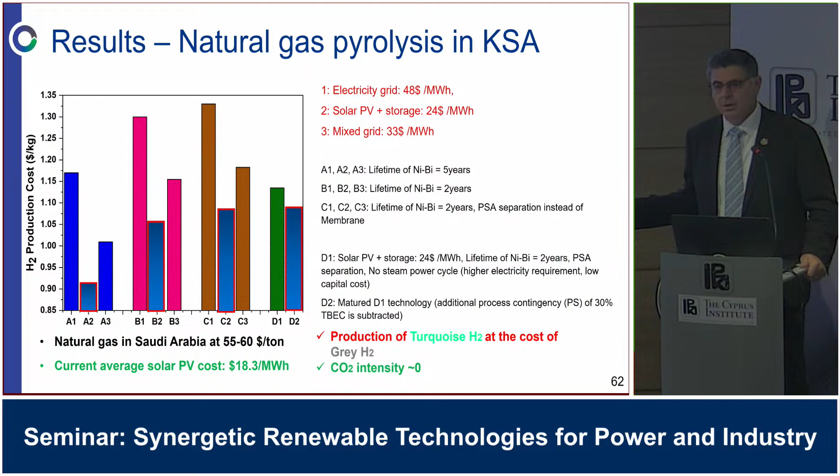You can see here we're looking at current production costs of hydrogen relative to the gray hydrogen cost of 0.9—see this one here? And of course, zero CO2 in this case because it's powered by renewable electricity; we're only producing carbon, there's no CO2.

There's a paper you could look at covering the economics of this, showing how in Saudi Arabia it can actually be viable.

Another thing we looked at is whether we can use concentrated solar thermal to power the whole process instead of renewable electricity, and what advantages that would have. We looked at indirect heating with thermal storage, or a direct heating system. This is a model—does it sit up, does it sit down, how are we going to feed this? We haven't worked out the technical details, but it's a model to see if using direct heat in, we could operate the system viably.

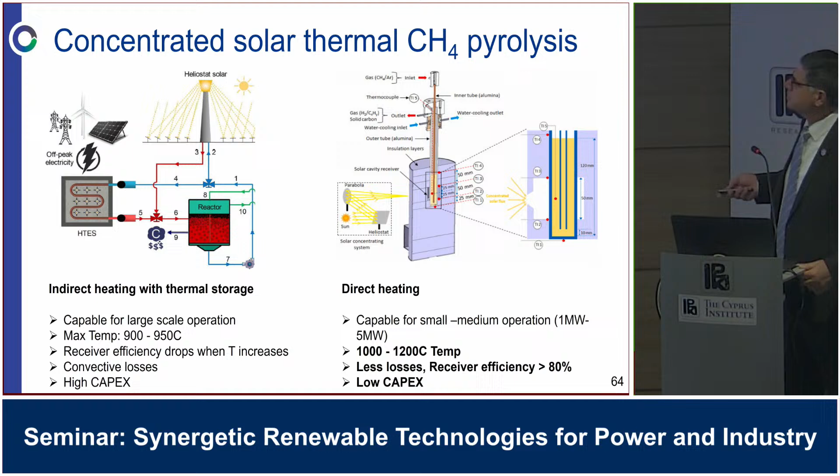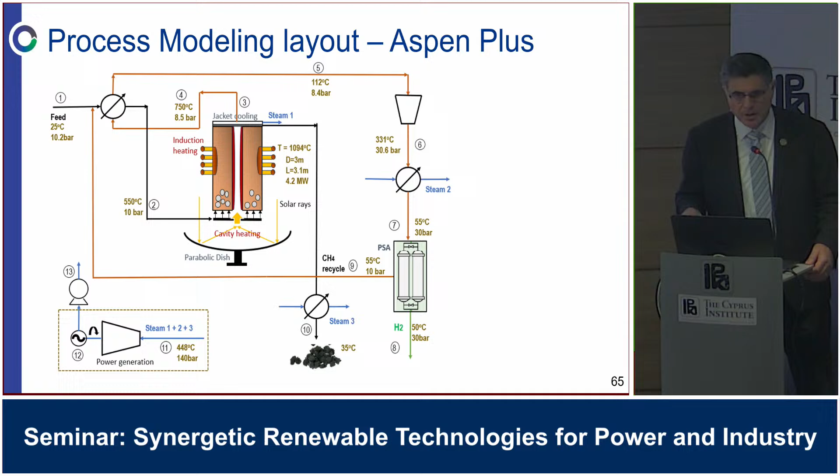So again, we built an ASPEN model looking at how much it would cost to have a parabolic dish, and whether this dish would achieve the temperatures we require. We compared 10 hours of CST versus 14 hours of grid electricity, induction heating at 4.2 megawatt thermal. We're using gallium in this case, temperatures of 1100°C, methane conversion of 80%, and a certain hydrogen output.

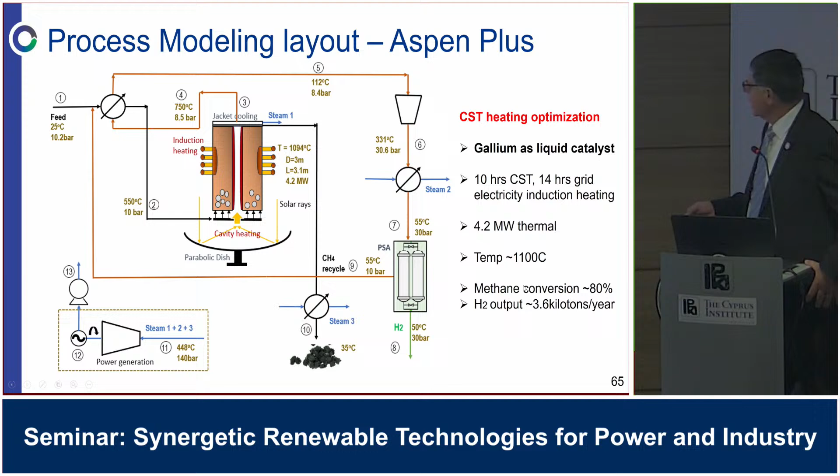Once we'd done that—again, the details are here—we arrived at this type of analysis, looking at the results for gallium.

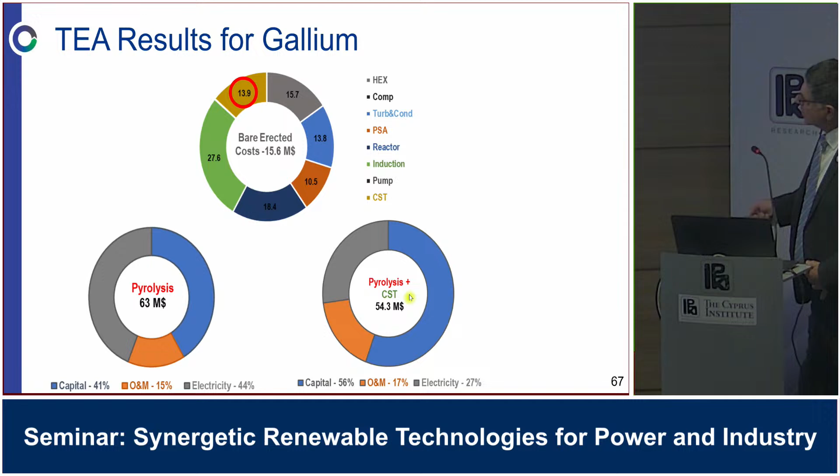So, bare pyrolysis, and pyrolysis plus CST. And then I wanted to bring you to the cost. So here's the different cost of electricity.

Now, blue hydrogen cost, of course, is predicated on finding a place to put the CO2. It's one thing to capture the CO2, the second is what do you do with it? Of course, with Aramco in the east, they put it underground to enhance oil recovery. As the CTO of Aramco tells me, we get it out of the ground, we put it back in the ground, so for him it's not a problem.

In fact, they're benefiting—they're reducing the viscosity, they're getting more oil out. But then, our university developed an atlas of storage capacity in Saudi Arabia, and we do have storage capacity for 10, 20, 30 years, but then from there on, what do you do?

And of course, there's a lot of low TRL here. We're not 100% sure it's going to stay there, and what happens to it, understood.

So combined CST is cheaper than pure electricity grid supply, and although nickel bismuth is slightly less active than gallium, at low purchasing cost it indicates overall better economics. And then we're assuming a conversion rate of 65%, and this is how much we produce.

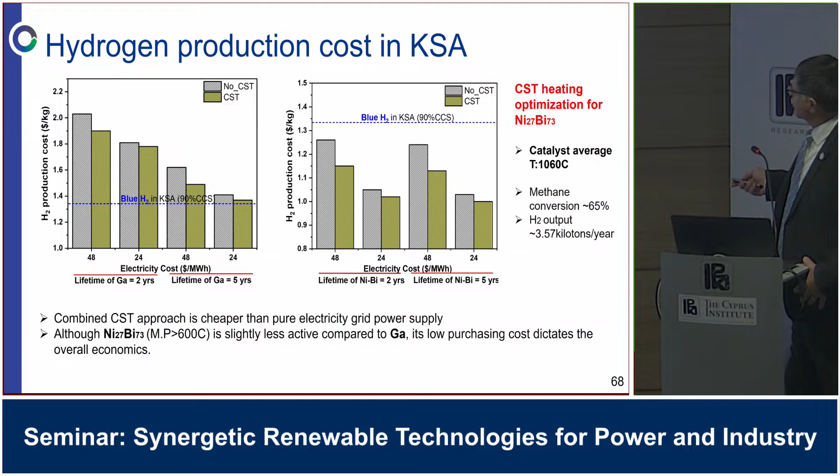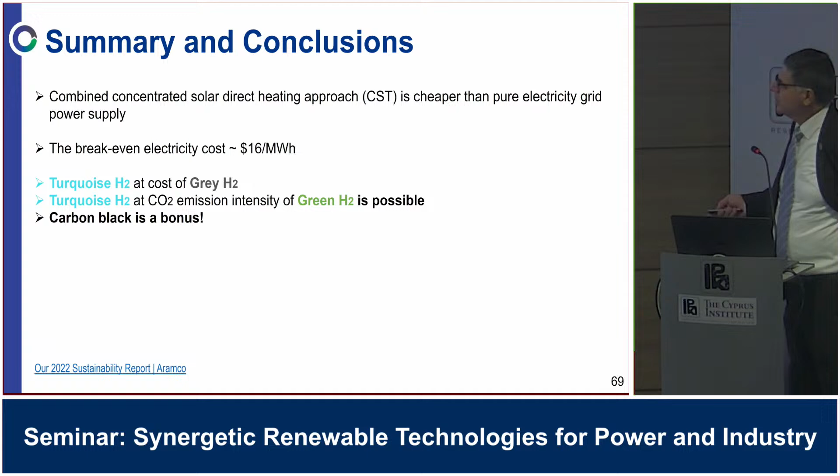So in summary: combined concentrated is cheaper than pure electricity grid and power supply. Break even is 16 dollars per megawatt hour. Turquoise hydrogen at cost of gray hydrogen. Turquoise hydrogen at CO2 emission intensity of green hydrogen is possible.

Carbon black is a bonus—anything I could get for the carbon is additional. No methane leakage during upstream operation—this is one of the criticisms. If you start with methane, your CO2 intensity will increase.

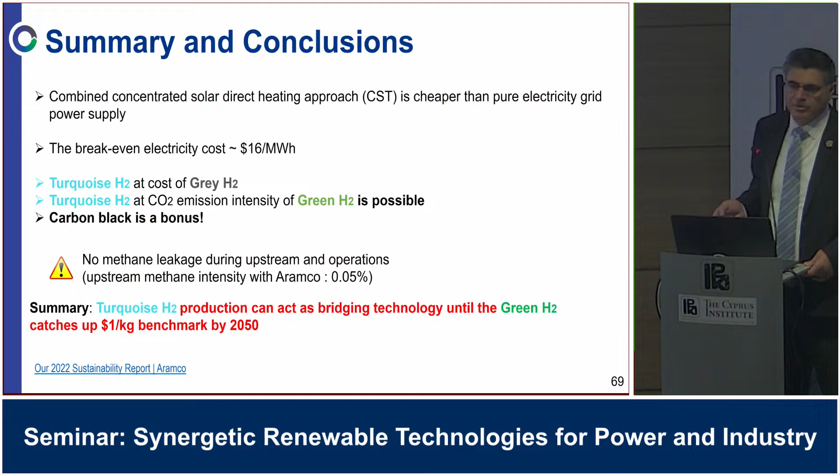And then hydrogen production can act as a bridging technology until green hydrogen catches up to the $1 benchmark by 2050. So, remember at the start I said we're trying to find multiple synergies of using renewable energy to drive different things, during the transition.

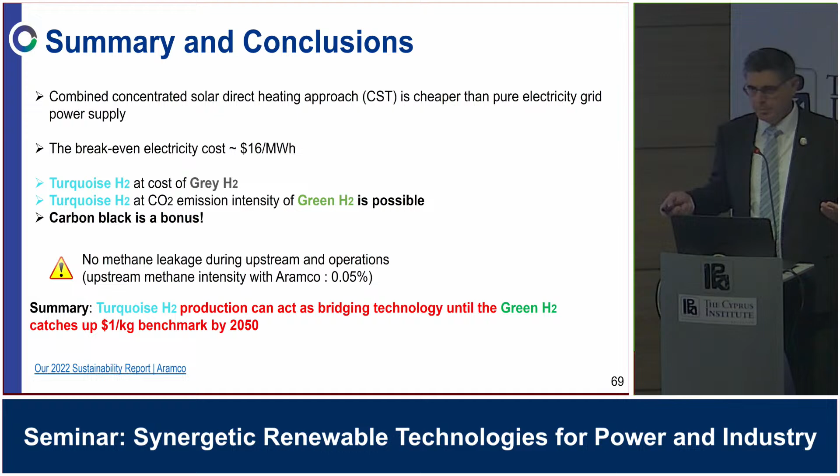And so this is where these technologies would be required. Maybe in the future green hydrogen is going to be the thing, but there will always be plenty of methane around, and the transition will take a while.

So these are my final remarks: the opportunity exists where synergetic technologies can be applied to reduce cost, provide firm supply, and enhance overall utilization. Scaling up is needed to de-risk some of these concepts.

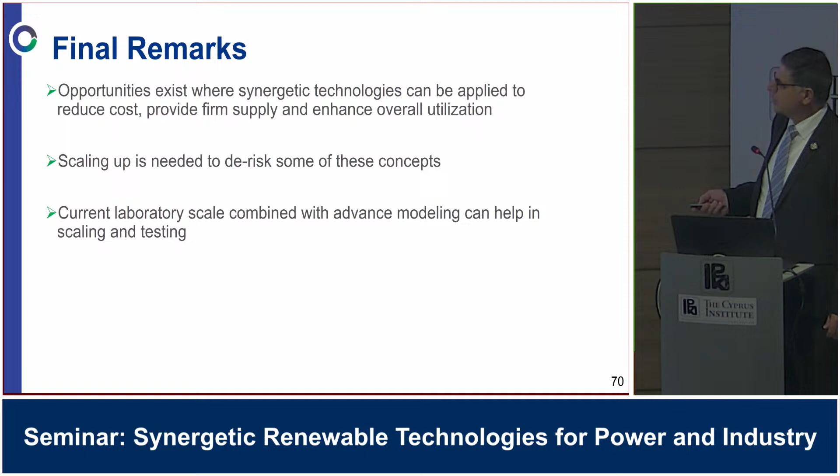Current lab scale combined with advanced modeling can help in scaling and testing. And of course, we are open for collaboration in any of these and other projects that is of mutual interest. And with this, I'll stop and thank you for your attention.